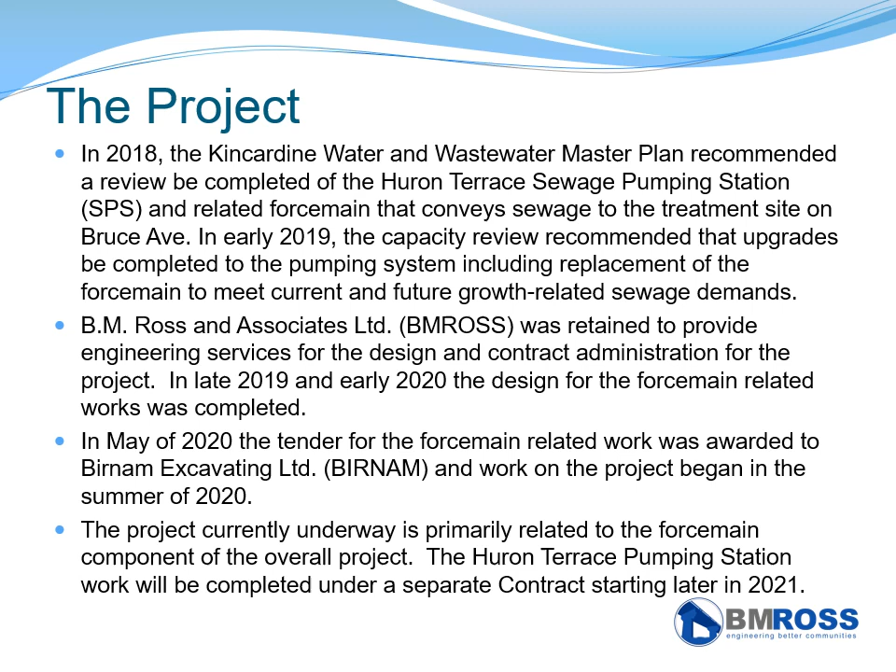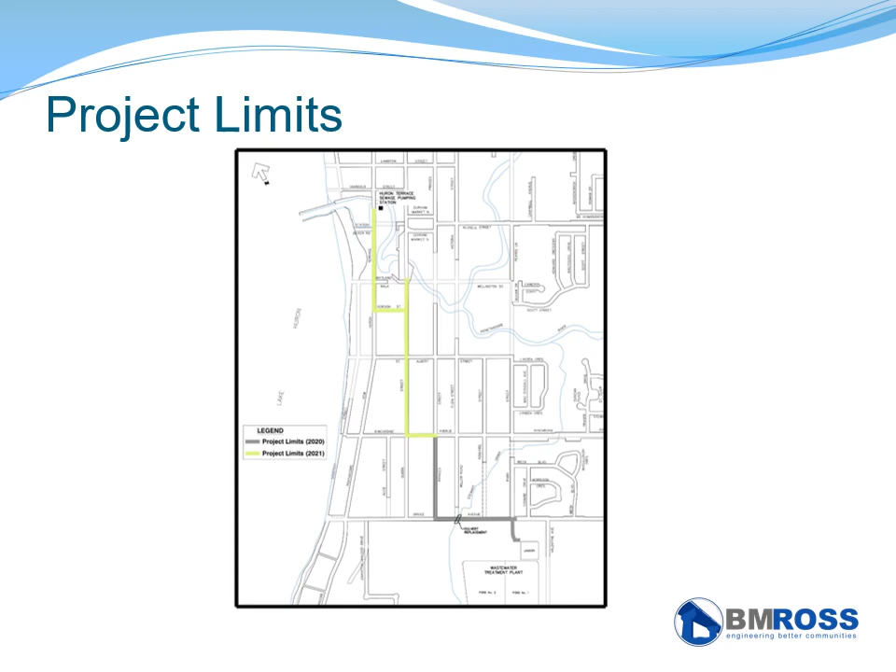The scope of work varies depending on the section of street associated with the Forcemain. For streets like Queen Street, the municipality is utilizing the installation of the Forcemain as an opportunity to upgrade and replace other buried assets, while on other streets like Huron Terrace and Gordon, the buried infrastructure that exists there now is in acceptable condition and is not being replaced. The next few slides provide further details on the extent of work being undertaken over the various street sections.

Starting in April, work will begin on Huron Terrace and is planned to be wrapped up in June. The work on Huron Terrace is limited to the installation of the new Forcemain, which is to be located under the East Boulevard. Some disturbance to the East Boulevard area and perhaps some of the asphalt in the northbound lane from Gordon to Whalen Walk will occur, including sidewalk and driveway disturbance. As work progresses north of Whalen Walk, the Forcemain is being installed by directional drilling methods, and because of this, disturbance to the boulevard should be minimized through that area that is protected by the guide rail.

Once past that area that has the guide rail, the Forcemain installation will return to a conventional open cut installation, and repairs to the boulevard area will be completed up to the parking lot for the Rotary Park. The Forcemain will then cut across the gravel parking area at the park and terminate at the pumping station closer to the top of the bank of the river. In 2022, following the completion of the pumping station work and after the heavy equipment is off-site, the parking lot for the Rotary Park will be paved with asphalt as part of the project.

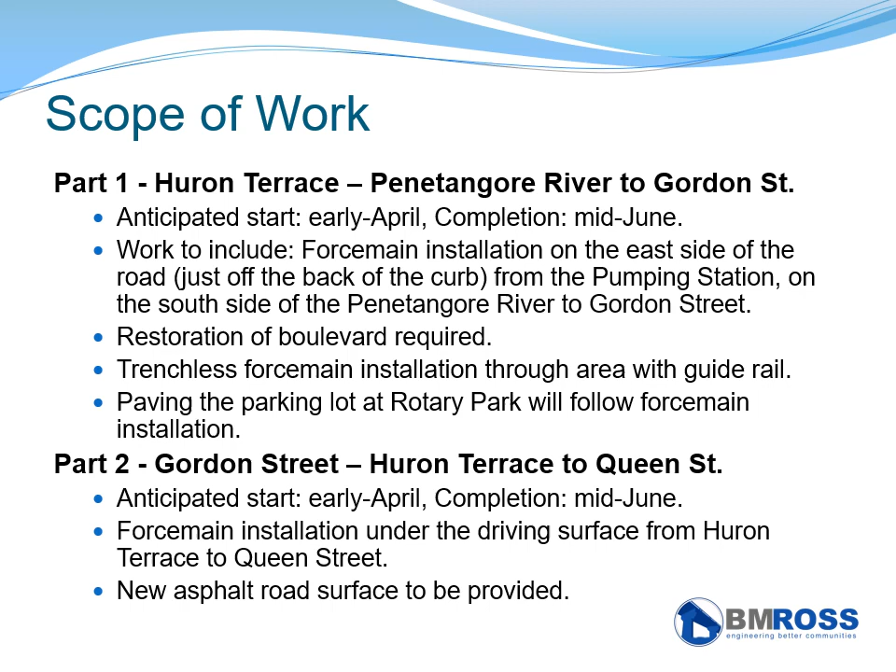So around the same time as the Huron Terrace phase of the project, the Forcemain installation on Gordon Street will be completed. The work on Gordon will consist of full asphalt removal, installation of the Forcemain, and asphalt paving following completion of the piping installation. There are currently no plans to disturb the areas on the boulevard, and work should be isolated to the area between the curb lines of the road.

Starting in March, work will begin on Queen Street, and for the first few months will be focused on the block between Kincardine Ave and St. Albert. Overall, the work on Queen will take the majority of the year, as it involves full reconstruction of the roadway from Kincardine Ave to Wildfang Lane. In general, the work is to progress from block to block. As the Kincardine Ave to St. Albert Street block is finished, work will continue northerly toward the second block up to Gordon later in the summer.

The work to be completed is summarized on the screen and will basically include the following: installation of a new sanitary sewage force main under the west lane of Queen Street from Kincardine Ave to Gordon, the replacement of the existing water main, sanitary sewer, and storm sewer from Kincardine Ave to Wildfang Lane. This work includes replacing all water and sanitary services from the main line to the property line. The removal and replacement of the curb and gutter along the entire length of the project.

The roadway itself will be reinstated to a constant width of 9.5 meters to accommodate future cycling needs in the community. The installation of a new concrete sidewalk within the East Boulevard will occur from Kincardine Ave to the north side of the Highway Variety. The existing sidewalk will remain in place in general, with sections replaced as needed, for the installation of the new curb or replacement of the water and sanitary services as required.

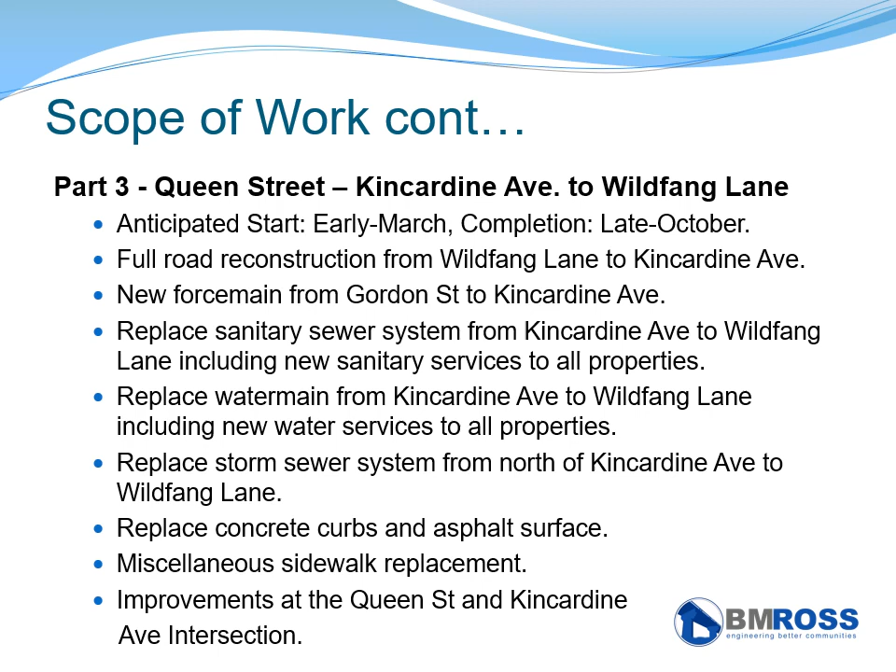Starting late in the summer, the work on Kincardine Ave will begin, which includes the installation of the new sewage force main, a new sanitary sewer, and a storm sewer, all under the north half of the roadway, followed by the replacement of the existing asphalt between the curb lines of the road. The existing sidewalk, boulevard areas, and curbing are not expected to be disturbed, apart from where necessary, as a result of the proposed improvements to the Queen Street and Kincardine Ave intersection.

For Princes Street from Kincardine Ave to Bruce Ave, the water main was replaced and the new force main installed last fall. The sidewalk on the west side of the road was also extended from Bruce Ave up to the school as part of the work. In the spring, Birnam will return to the site and finish up the restoration of the boulevards with topsoil and sod placement.

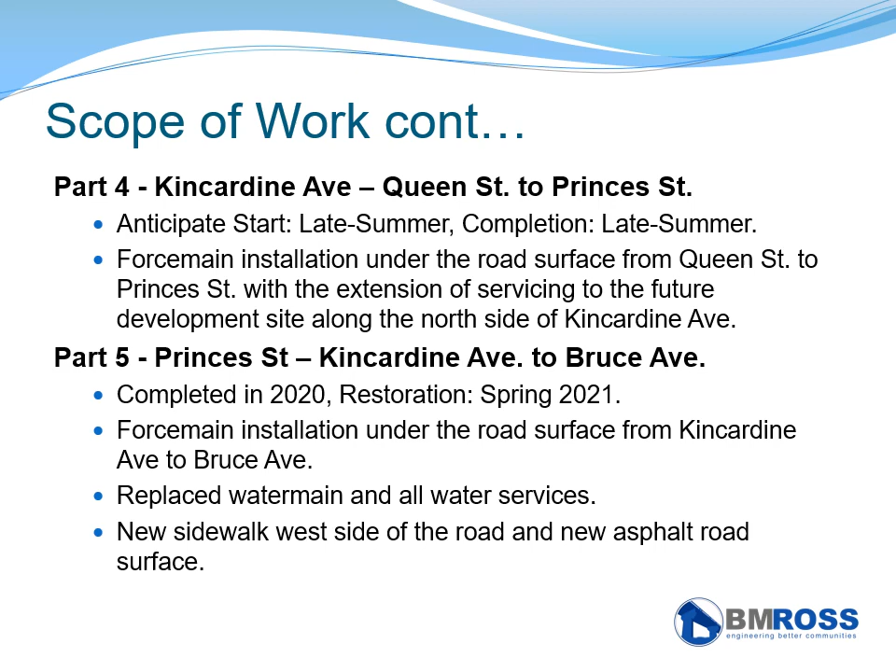For Bruce Ave, and similar to Princes Street, the work was largely completed in 2020. And all that is left is final boulevard restoration that will take place when things dry up later in the spring. The work included the upgrade of the roadway from a rural cross-section to an urban cross-section, including a new storm sewer, the new force main, curb and gutter, sidewalk on the south side of the road, and the installation of a new culvert over the Stewart Drain, which allowed for improvements to the road profile and the elimination of the sharp rise over the culvert that existed prior to the project.

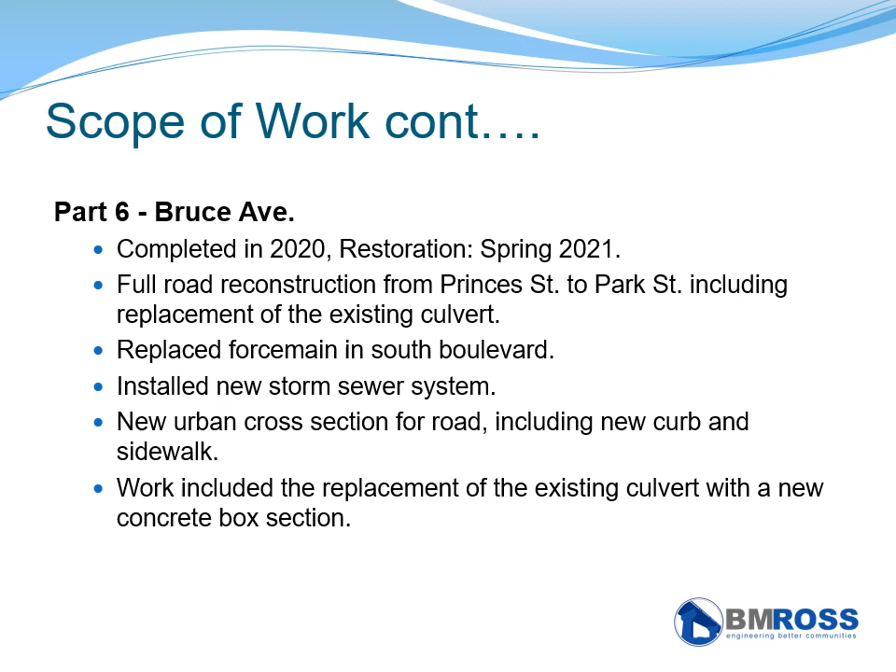The last component of the final road restoration of the impacted streets, including Bruce, Princes, Kincardine, Queen, and Gordon, is the placement of the top coat asphalt. It is normal procedure to allow the rebuilt road to sit over a winter before the final lift of asphalt is placed, as this allows minor settlements to be addressed in the following year prior to placing the final course of asphalt. On Bruce and Princes, the top lift of asphalt will be laid in 2021, while the streets being rebuilt this year will see their final lift of asphalt in 2022.

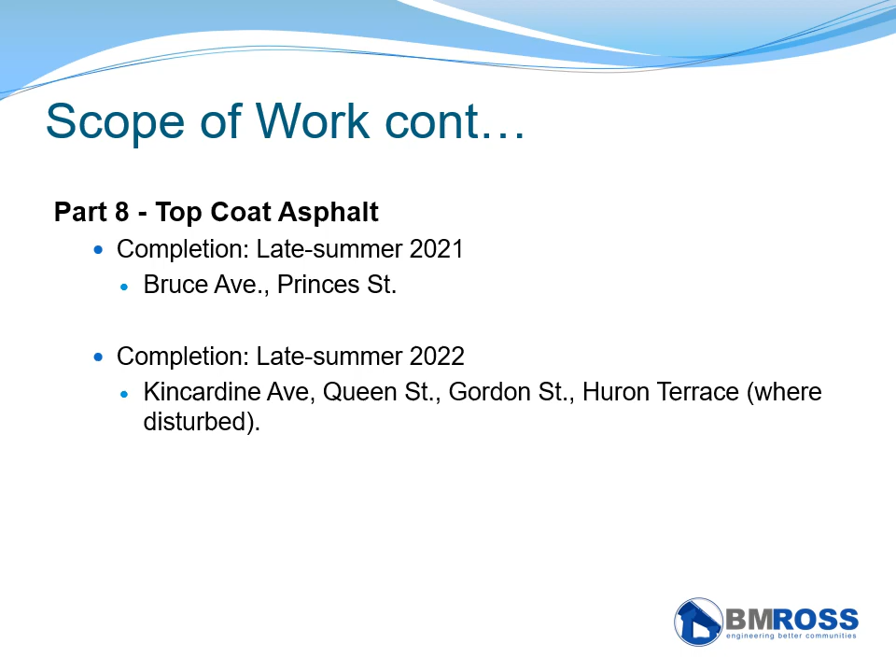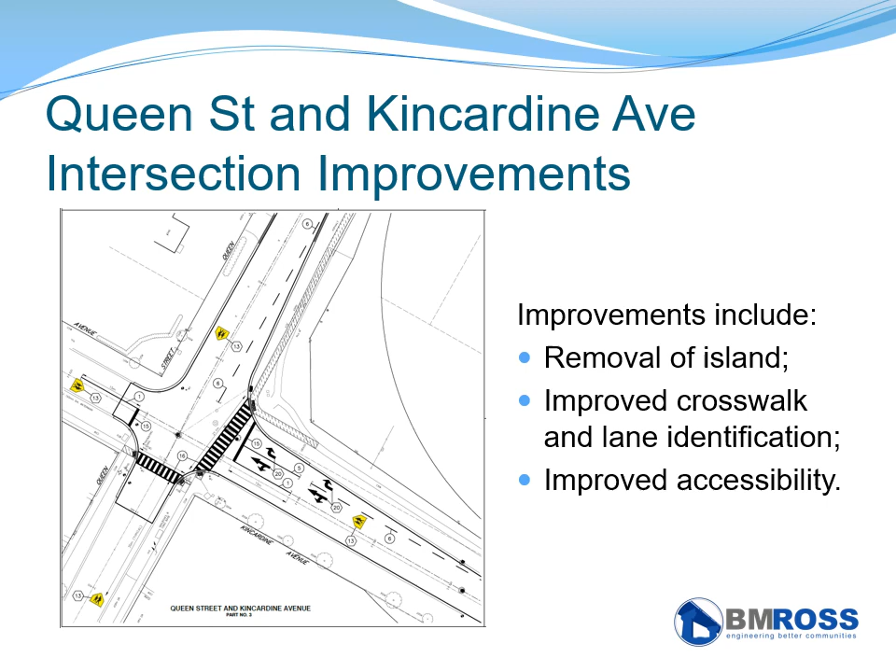As noted, improvements are planned at the Queen Street and Kincardine Ave intersection. These improvements include the removal of the traffic island at the northeast corner and better defined crosswalk and turning lanes. Tactile plates will be added to the sidewalk crossing locations at all four corners to meet provincial accessibility guidelines. In addition to painted directional arrows, new colorized advanced school crossing paint will be added on the new asphalt to provide additional notice to motorists that they are approaching a school crossing.

During construction, because of the need for various road closures to through traffic, detour roads have been established to help vehicles and pedestrians traverse around the site. On Huron Terrace, there may be times where traffic is reduced to one lane, but for the most part, the traffic impacts will be minimal. Access to Station Beach Road will not be impacted by this project. Gordon Street will be restricted to local traffic only.

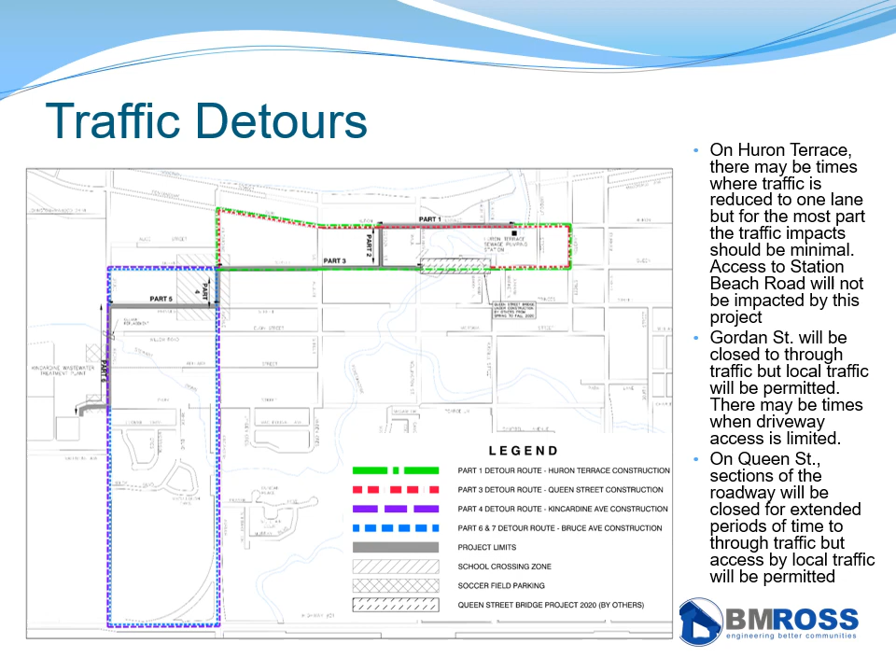On Queen Street, sections of the street will be closed for extended periods of time to through traffic. Because of this, we're providing more detail in the next two slides specific to Queen Street to help describe what the detour route will be through there. Kincardine Ave will be reduced to one lane with local traffic when needed, but will remain open for school traffic. It is important to note that the majority of the proposed Kincardine and Queen Street intersection work is to be completed during the summer months when school is out.

Due to the impactful nature of the proposed work on Queen Street, the road will be limited to local traffic only, with intermittent closures as required from time to time to complete the infrastructure upgrades. As noted, Birnam, the contractor, plans to complete the work on a block-by-block basis, with the initial focus on the stretch between Kincardine Ave and St. Albert. This will be advantageous to the property owners, as disturbance fronting each property will be reduced to smaller amounts of time than what it will take to complete the entire project.

Where possible, driveway access will be maintained. However, there will be times when properties do not have access to the driveway. The contractor will do their best to notify affected property owners when access to a driveway may be difficult, so other arrangements can be made. Detour signage will be provided to assist in directing traffic as shown above.

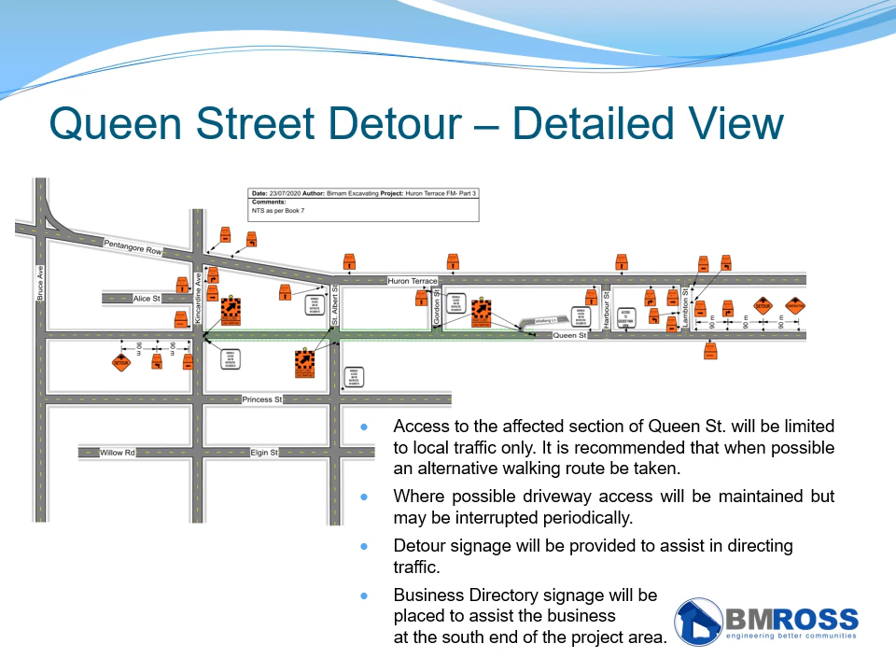The above provides a simplified version of where Queen Street will be closed to through traffic, which will include road closed signs, sidewalk access signs, and business access signs. Although Birnam will maintain access to the existing sidewalks, there will be times where it may be restricted because of various construction activities.

Because of this, it is recommended that when possible, an alternative walking route be taken rather than the Queen Street corridor. The importance of maintaining access to commercial facilities is recognized, and like the residential driveways, Birnam will maintain access to these establishments throughout construction. Business open signage will be placed to help clarify to patrons that properties are open. Emergency services have been made aware of the works, and the contractor and the municipality will notify them when specific locations are under construction.

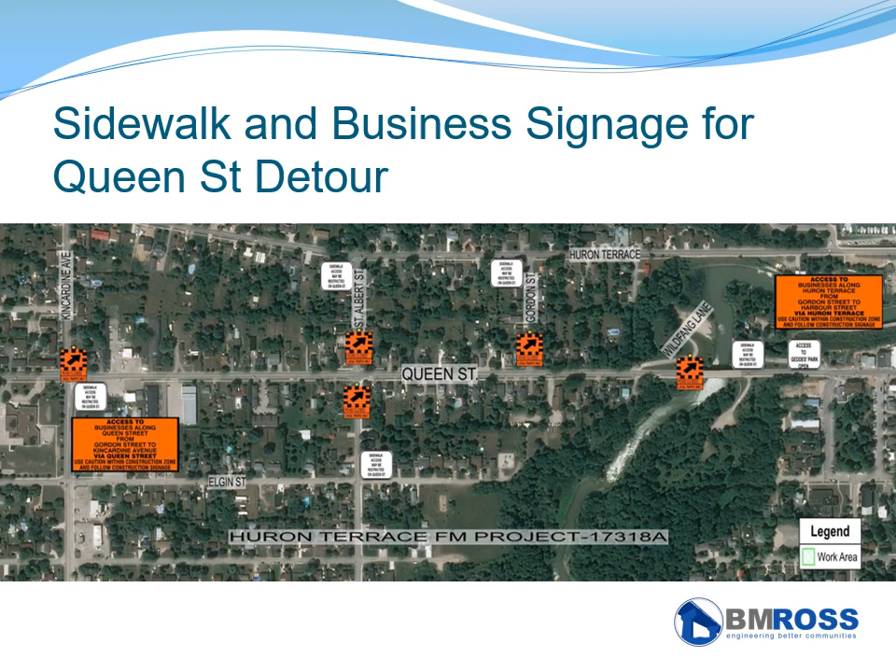A pre-construction survey is underway to document pre-existing building conditions such as cracks, broken concrete, settlements, and other common issues that private buildings often experience as they age from the time they are constructed. These surveys are completed to help support future claims and are to the benefit of all parties involved. The inspections are being completed by OZA, spelled O-Z-A, and notification to each property will be delivered by their staff if they have not already done so.

The pre-construction survey is to include the interior of buildings where access is granted by the owner or tenant. Should access not be provided, it will be difficult to evaluate whether construction had any kind of impact for claims that may arise after construction is done. The information will only be used should there be concerns raised following completion. The information is not accessed if there are no claims brought forward.

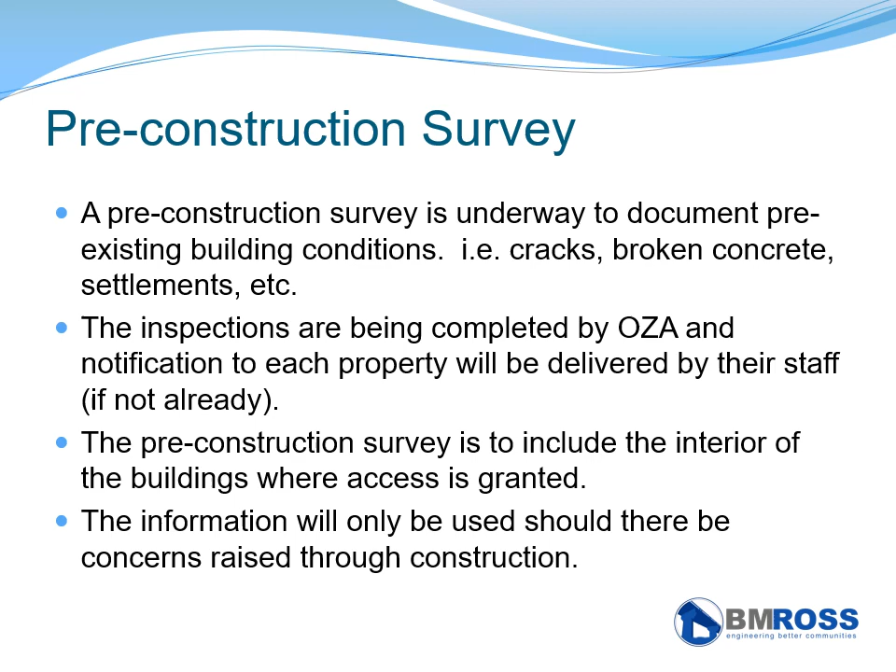We often receive common questions related to what will or will not be impacted as a result of construction. The next few slides address many of those common questions, and I will list them off. Blue box and garbage collection will not be impacted, but we do ask that residents mark their name and address on their bins in the event that they are misplaced and need to be returned to their home.

Emergency services, like I said, have been made aware of the project and the proposed detour routes that go along with it. The local school and the bus companies associated with the school have been made aware of the project and have adjusted their routes accordingly. The municipality will be active with their social media campaign and will provide updates as quickly as possible should plans evolve through construction.

Access to the driveways, like I said, will be maintained, but there may be times during construction when it is unavoidable that they are blocked. Should it be necessary to restrict access to private driveways, or businesses for that matter, notification will be provided on site as much as possible to provide some notice for alternative parking arrangements.

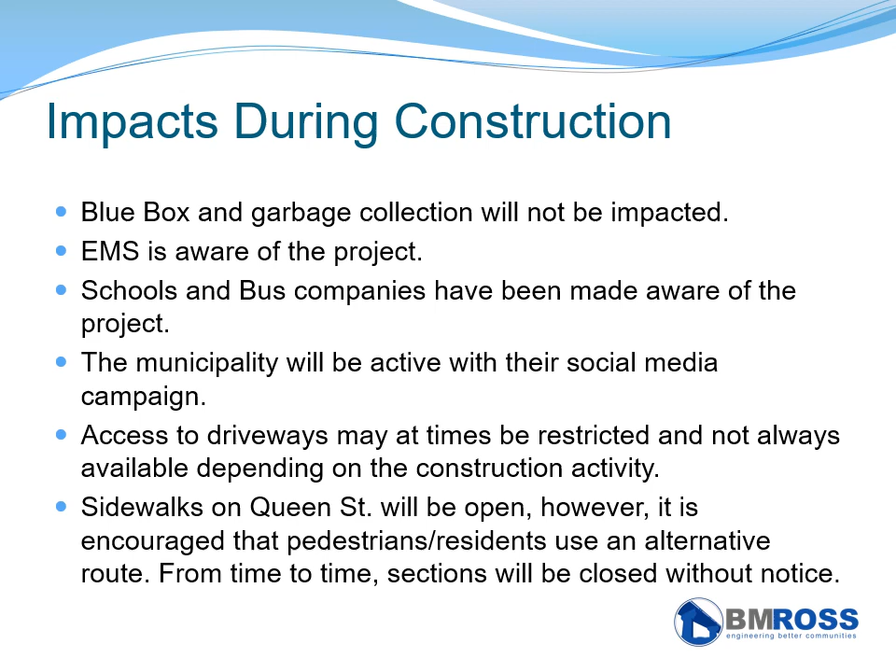Sidewalks on Queen Street will be open for the most part, but it is generally encouraged that pedestrians and residents use an alternative route, as from time to time sections will need to be closed without notice, and it may be easier for all just to take a new route for the duration of the project. During construction, there will be no on-street parking on Huron Terrace, Gordon Street, Queen Street, and Kincardine Ave within the project limits. Parking on Kincardine Ave west of Queen will continue to be permitted.

Through construction, water and sanitary services may continue to be used as normal. If for some reason these services will need to be temporarily restricted for a short period because of unplanned issues that may arise, all impacted property owners will be notified directly by field staff. For any planned disruptions, at least 24 hours of notice will be provided to impacted property owners. There are no planned hydro or telecommunication disruptions.

Access to businesses will be maintained as much as possible. Business directory signs are to be installed at the ends of the block streets to direct shoppers to the stores. To keep the signs less cluttered, the wording will be general, noting that access to all businesses and establishments is available.

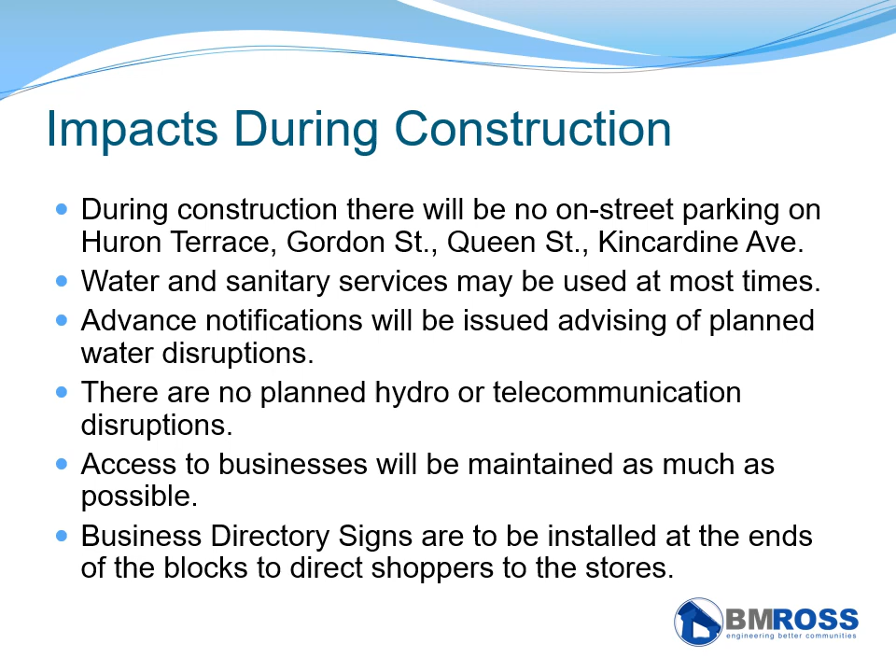Due to the nature of the Queen Street work, we're providing the following additional information specific to that area. Prior to construction, property owners are advised to remove any planting beds, flowers, shrubs, and hedges, any underground sprinkler systems, any heated driveway systems, and any fencing from within the road allowance and relocate onto their private property.

On Queen Street, temporary potable water servicing is proposed to be installed. A temporary water main will be laid on top of the ground across the front of most properties. Ramping will be provided by the contractor where water lines must cross streets or driveways, and individual water services will be installed along the ground to each property. After the temporary water system has passed the required testing and disinfection, a temporary connection will be made at the curb stop in front of your property. A short disruption in service will be required for this switchover at that time.

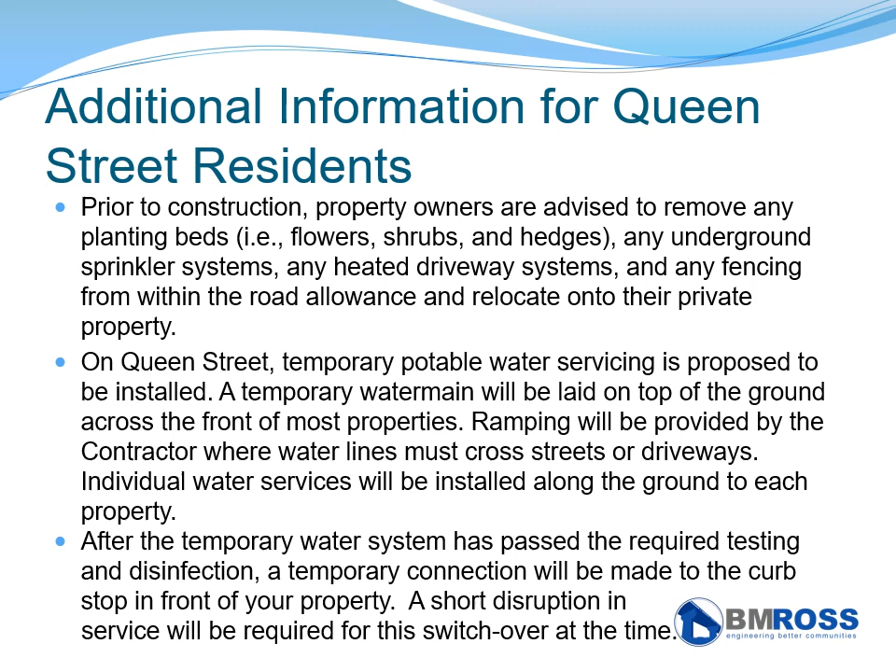For restoration of the boulevard, we note the following. Existing grass boulevards will be restored with topsoil and sod. On Queen Street, where the existing sidewalk and driveways are disturbed, the material on the house side of the sidewalk will be matched to the existing where possible. On Queen Street, existing asphalt parking areas that may currently exist between the sidewalk and the roadway within the road allowance will be restored with topsoil and sod.